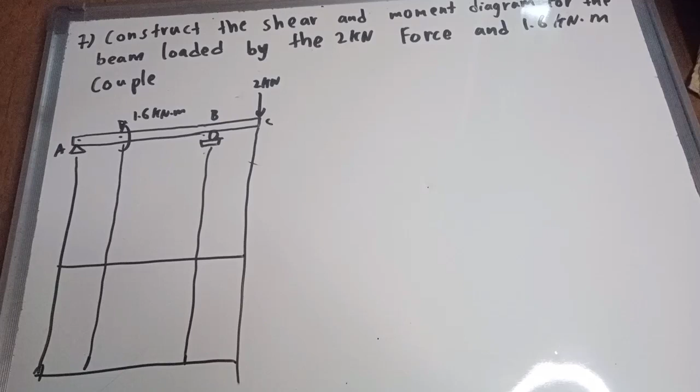For problem number 7, the question is to construct the shear and moment diagram for the beam loaded by the 2 kN force and 1.6 kN·m couple.

There's a couple here on this simple support beam - not a couple relationship, but the couple itself, which is 1.6 kN·m. When you see this on a simple support beam, that refers to the couple of the simple support beam.

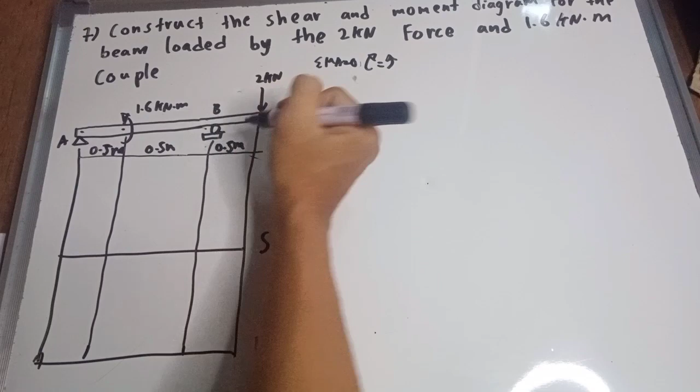We know the formula for moment is force times distance. So the 2 kN force rotates about A, and its rotation is clockwise. That's 2 times what? 0.5 plus 0.5 plus 0.5 equals 1.5, so the distance is 1.5 meters.

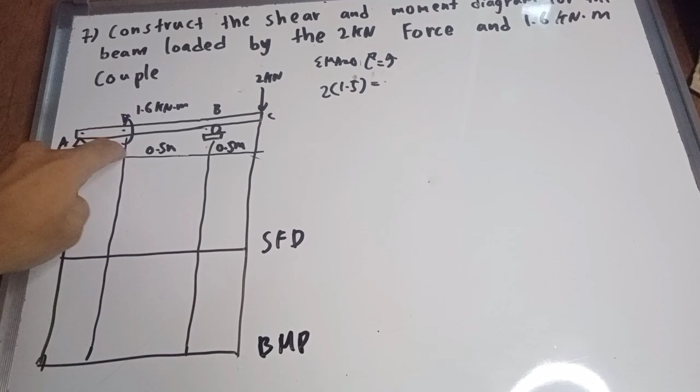What's next? The next counterclockwise rotation is our reaction at B. Since it's a support, it's most likely upward, so when it rotates, it's counterclockwise. The distance is 1 meter from point A, so that's plus RB multiplied by 1 meter.

Let's simplify. 2 times 1.5 equals 3. Now let's transpose the 1.6 to the other side, becoming negative 1.6. That's 1 times RB, which is RB. So 3 minus 1.6 equals 1.4 kN - that means our reaction at B equals 1.4 kN.

Now that we have one reaction at B, what do we do next? Summation of forces vertical, since only one force is upward, which is RA. So summation of forces Y: RA plus RB, where RB is 1.4, equals the downward forces.

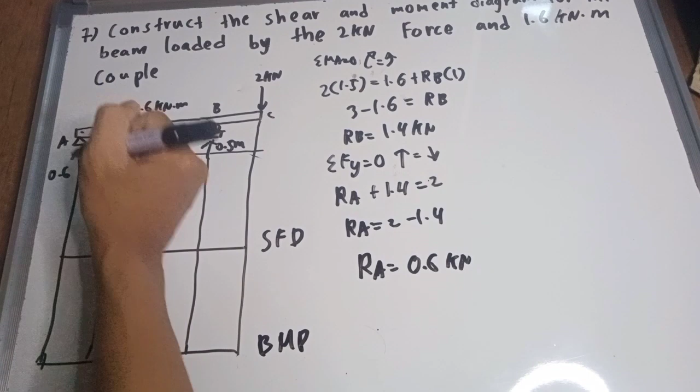So, ilalagay na po natin yung mga reaction support kasi buburahin natin yan kasi gagawa po tayo ng isang equation dyan ng shear and moment. So, ang RA po natin that is 0.6. Nasa na yun? 0.6, ilagay po natin ng 0.6 dito. 0.6, no? So, that is RB 1.4. So, 1.4 dito, so yan. So, burahin natin ito kasi nakuha na po natin ng mga reaction.

So, ngayon, dahil nakuha na po natin ng reaction, ang gagawin po natin, katulad po ng ginagawa natin dun sa unang problem po natin, gumagawa po tayo ng equation. So, although hindi naman niya sinabi dito na construct the shear and moment diagram and require the equation of the shear and moment diagram. So, hindi naman niya sinabi. So, pag sinabing construct, ibig sabihin lang po, gagawa ka na lang ng shear and moment diagram.

So, gusto ko sana mag-direct na ako dito, pero dahil sa statics of rigid bodies po tayo, kailangan muna nating dumaan sa mga equation ng shear pati equation ng moment. So, siguro, I think na kapag sa next problem ko is magda-direct na po ako dito dahil hindi naman niya nire-require na gagawa ka ng equation. Okay, sana kung sinabi niya dun sa question. So, hindi naman niya sinabi, no? So, siguro ito gagawan ko muna ng equation.

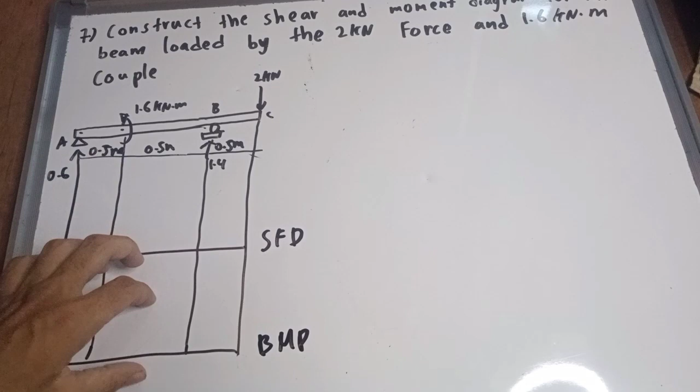Then, the next problem sa number 8 ata, I think na hindi ko nagagawa ng equations, which is magda-direct na po ako sa shear and moment. At least, alam niyo na yung kung paano niyo, kung sakaling gagawa niyo ng equation, alam niyo na yung kung paano gagawa ng equation. Although, same lang naman ang makukuha mong sagot o shear and moment diagram, gumawa ka man ng equation o hindi, same lang po yan. So, gagawin muna natin ng equation yung problem number 7, no? By the next problem po natin, hindi na po natin gagawin.

So, yan, so from point A to point, unahin natin yung point A to point D. So, kapag tinat po natin yung, ano bang tawag natin dito? So, tawagin na lang natin itong, that is A, B, C, D. So, sabihin natin dito, point D, yung couple natin, no? So, sabihin natin point D. So, ikakat po natin yung beam natin from point A to point D. So, pag kinat natin yan, ganito yung equation.

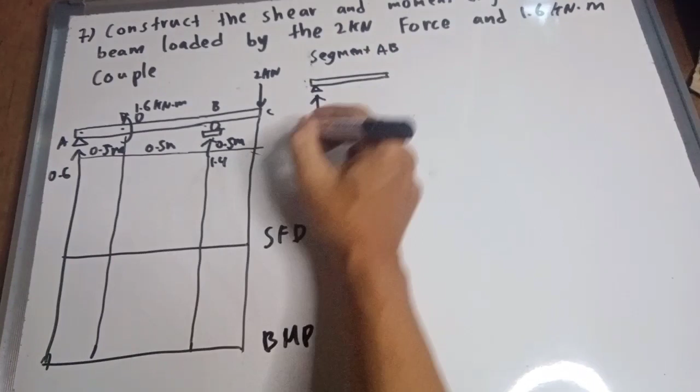From segment, sabihin natin segment, ano yun, segment AB, no? So, sabihin natin segment AB. So, ganun po yung beam. Halimbawa, for example, ganito yung beam po natin. So, meron po tayong pin support dito, which is, ganyan, upward, no? So, ang pin po support natin dyan is 0.6 kN, no?

So, yan, 0.6 kN. So, ngayon, exactly po na hindi ka po nag-cut sa totally sa mismong point D. Bakit? Kasi pag sinabi kasi nating dyan tayo mag-cut sa mismong point of D, ibig sabihin lang po exact distance na po dyan. Sa pag sinabing exact distance, ibig sabihin meron na pong tayong distance na 0.5 meter. Pag exact po nasa point D ka po nag-cut. So, usually, hindi mo na kailangan gumawa ng equation. Bakit? Kasi wala kang in terms of x, hindi ka makakagawa ng isang variable na kung saan magkakaroon ng equation. Bakit? Kasi siyempre, may exact distance na yan. Alangan naman gagawan mo ng equation.

So, hindi mo siya pwedeng gawin ng equation. Pero, pag nag-cut ka ng beam, hindi mo siya totally sa sinasabi na dito sa point D mismo. Ibig sabihin po, kapag nag-cut po tayo ng beam, merong maliit po dyan na sobrang liit. Na kung saan, tinatanggal po, ang tawag, kung hindi ako nagkakamali, ang tawag is infinitesimal. No? Infinitesimal size ata, so maliit lang masyado ikakat mo. Kaya dito hindi siya sinasabi na mismong point D ka mismo nag-cut. Kasi sobrang liit lang ng ikakat mo. So ngayon, dahil hindi po tayo nag-cut sa mismong point of D, ngayon ang tanong, hindi po natin alam ang distance. So sabihin natin ang distance dito is x.

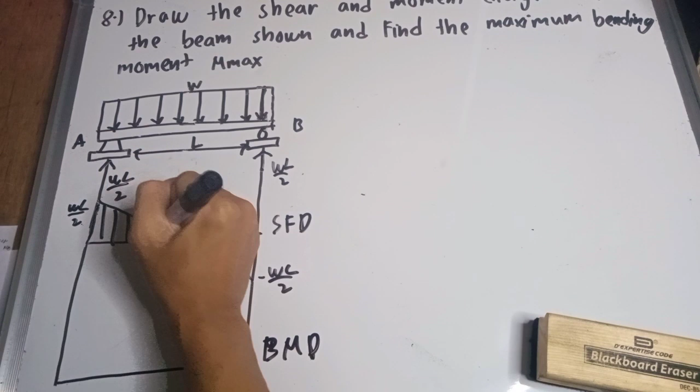So ngayon, paano mo yan i-close? Madali lang i-close yan. Kasi tingnan mo, negative WL over 2 plus positive WL over 2, that is 0, di ba? Pag sinamap mo yung negative WL over 2 sa positive WL over 2, that is 0.

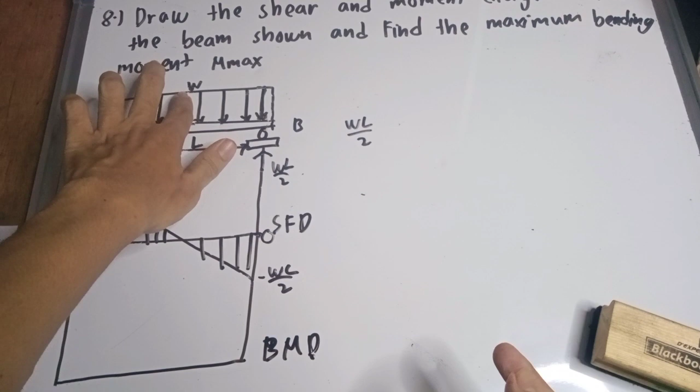Ngayon, hindi kasi ako satisfied. Paano nangyari yung negative WL over 2? So ganito yan, di ba, umakyat siya dito ng WL over 2. Ngayon, positive dahil hinihila ng support. Hinila niya pataas dito, bumagsak, nakasalubong niya si W na forces. Ngayon, ang direction ng pupuntahan ni W na forces, pababa, so naging opposite siya. So nung umakyat yung WL over 2 na to, nakasalubong niya yung forces na pababa, that is negative. So negative W. Ngayon, i-prove natin paano nakuha yung negative WL over 2.

Ngayon, pag sinamap mo yan, that is negative WL over 2. So bakit naging negative WL over 2? Kasi tingnan mo, negative 2 yung coefficient ng WL. Then ito positive 1, so positive 1 to negative 2, that is negative 1, no? Imaginary coefficient naman, kaya nagiging negative WL over 2 dahil dito.

So sir, bakit W lang naman ito, sir? W lang, bakit nilagyan mo pa ng L dito? Nilagyan po natin ng L yan dahil isa po siyang rectangular load o uniform distributed load.

Kung i-convert po natin yan to poles, di ba kung natatandaan natin yung problem number 1 ko, o problem number 2, ang ginagawa ko po doon is, paano yung uniform distributed load ay i-convert sa isang simple support beam with subjected sa isang uniform. Ibig sabihin po, subjected ito sa isang uniform. Pag subjected sa isang uniform, minumultiply po natin yung height sa base.

Kaya nagiging WL dito. Kung tutuusin, kung uniform support lang ito o simple support beam, ang gagawin ko lang dito is madali lang, kasi hindi ko na isasama yung L. Bakit? Kasi simple support beam siya. Unlike dito na uniform, so kailangan mo siyang convert to simple support beam. Para ma-convert mo siya sa simple support beam, kailangan mo i-multiply yung W sa L. Di ba? So yan, na-prove yan kung bakit naging negative WL over 2.

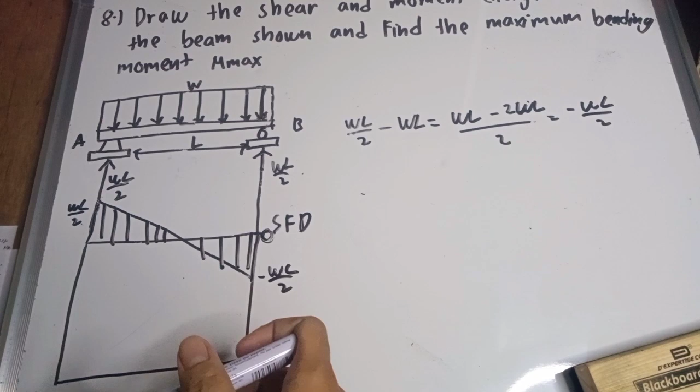Ngayon, pag sinamap mo naman yung negative WL over 2 sa positive WL over 2, makaklose mo yan. Makaklose, that is 0 ngayon. So ngayon, kung gusto mo naman gawa ng equation, ikaw na bahala, kasi wala akong balak gumawa ng equation dito. Although madali lang siyang gawa ng equation, pero hindi ko siya gagawin, dahil gusto ko na kayo mismo ang gagawa, para ma-practice yung sarili ninyo na mapag-equation man ang gamitin mo, then substitute the distance, same lang po makukuha mo.

Dito naman tayo sa moment natin, sa moment diagram naman natin titirahin. Dito naman tayo sa bending moment diagram, dapat ma-close din natin dito, kasi kapag hindi po natin na-close, useless po dito. Okay naman, kasi kung na-close natin dito, malaki yung chance na maka-close natin yung moment diagram. Tingnan natin.

Ang ano natin dito is ganito. Ito, positive dito, di ba? Positive, so positive siya dito, no? Kung positive po siya dito, alam niyo yung sa concave, pag naka-smile po, halimbawa, paano ba to? Yung nasa elastic curve pala yun, no? Pag naka-positive po yung ano natin, ito pa yung concave, yun po.

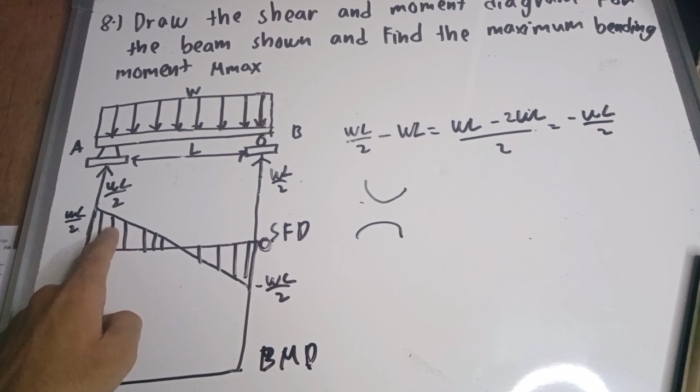Naka-smile at nakasimangot. Kapag positive po yung ano natin, positive po yung tawag dito, pag positive po yung shear mo, ibig sabihin lang po, pag positive po yung shear, ibig sabihin po naka-smile po siya. Then kapag negative po yung shear, ibig sabihin nakasimangot po siya. Negative yung shear, nakasimangot. So ang magiging shear natin, that is positive dito, no, parang akyat dito. Parang ganito, ito, ganito.

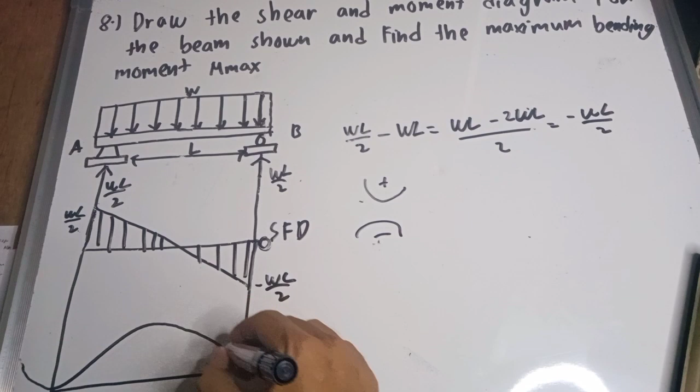Na-close na natin, so sir, ang dali lang naman ha. Paano yung direct na close na yan? Direct na na-close na yan, parang simple lang naman. Paano yan naging ganyan? Tingnan niyo, ito kasi ito positive shear, no, ibig sabihin naka-smile yan. Ibig sabihin ito yung shear mo, ito magsisimula ka dito, ito na lang, no?

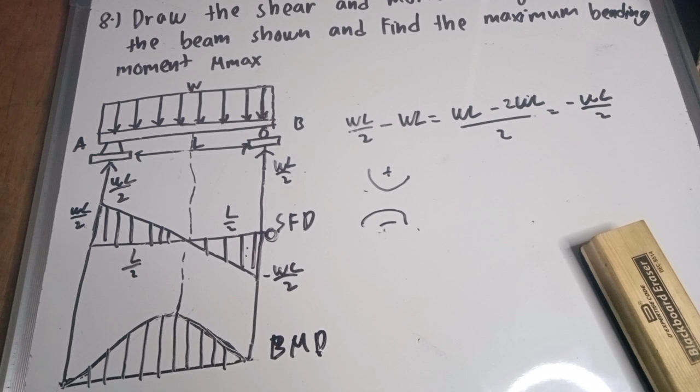So, ano ba yung area ng triangle? That is 1/2 base times height, sir. Ayan po yung area ng triangle. So, ang galing na estudyante, kabisado na yung formula. 1/2 base times height. So, 1/2 base. Ano yung base? Sir, ang tinutukoy niyo po ba, sir, yung maximum? Yes, kasi yan po yung hinahanap natin, yung maximum bending. So, dito lang sa gitna.